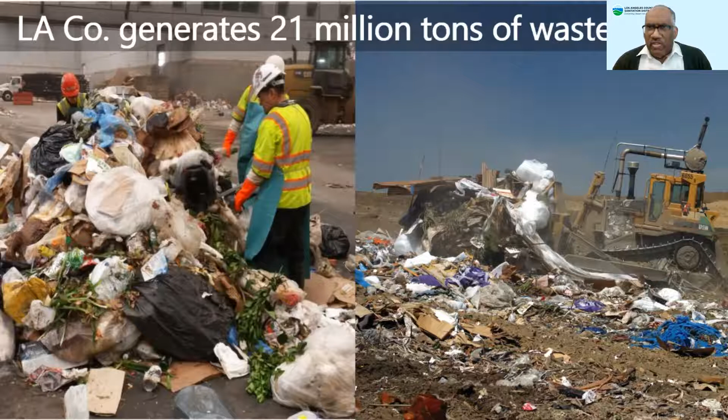Stepping back, LA County generates 21 million tons of waste per year. Of that 21 million, about 9 million is buried in landfills. Here's an aerial shot of one of our landfills, the Scholl Canyon landfill.

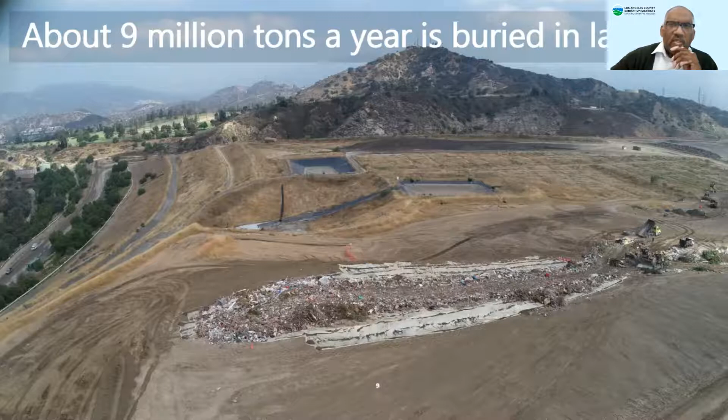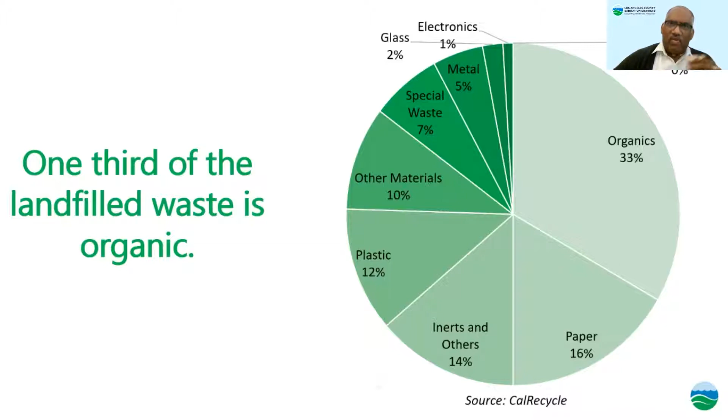Of the 9 million tons buried in landfills, about a third of that is organic waste. And of that organic waste, in LA County alone, minimally 4,000 tons of food waste is thrown out each day. Here's a shot at our Puente Hills material recovery facility of food waste coming in, organic material coming in.

So what's the issue? This food waste, when disposed of in a landfill, can release methane into the environment. Methane is a greenhouse gas that, for a long time, I thought was 23 times more disruptive than carbon dioxide, but looking at the state's website, it's over 50 times more disruptive than carbon dioxide as a greenhouse gas. Food waste itself generates about 6 to 8% of the methane in our atmosphere.

So California, being a leader in environmental regulation, is out front in terms of climate change initiatives. They passed two laws: AB 1826, which requires commercial organics recycling. A couple of years ago, it applied to any company that produced 4 cubic yards per week of organic material, but because we weren't meeting the state's goal, they lowered that number to 2 cubic yards per week.

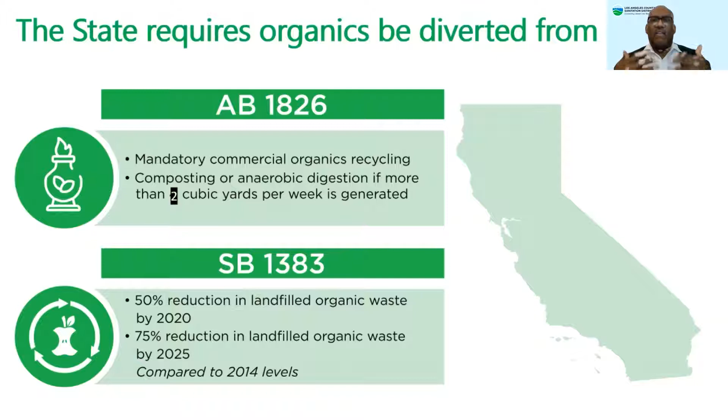So if you're producing 2 cubic yards per week of organic waste, you have to have a mandatory organics recycling program. The second law, SB 1383, requires a 50% reduction in landfill organic waste by 2020 and a 75% reduction of landfill organic waste by 2025.

Genesis, up here, there seems to be a question. I'll take a question right now. Yeah, what did you mean by commodity?

Commodities, plastic, cardboard, glass, anything that we want to divert or recycle as much as possible. At our Puente Hills MRF, we have the capability of pulling out cardboard, plastic, and paper, baling it up, and selling it to folks that will recycle and reuse it.

All right, perfect. Thank you.

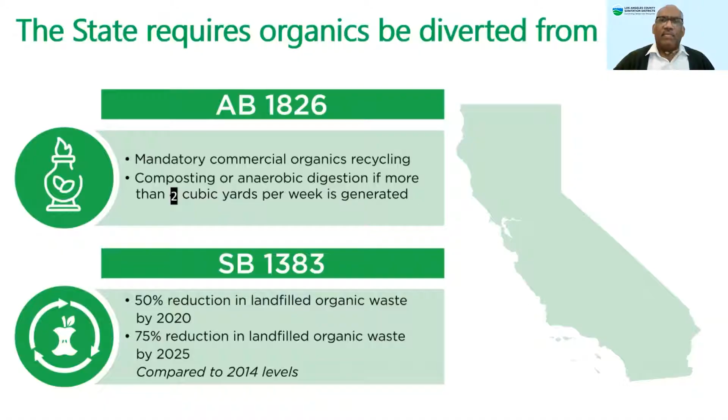SB 1383 was passed a couple years ago, and it requires cities and jurisdictions in California to divert food waste and organic waste from landfill. Each jurisdiction should have a program in place by January of next year, so we're less than 11 months away from that deadline. The districts are uniquely situated to help our cities, since 78 of the 88 cities sit on our board of directors, to help them meet this organics diversion requirement.

We have a solid waste site, our Puente Hills Material Recovery Facility. It's the foundation of our solid waste management, a place where we can collect food waste that's brought in.

SB 1383 in California is for food waste. We want to keep it out of landfill, and if it can't be reused, in terms of being donated to food shelters, then the state wants it to go either to anaerobic digesters or composting. We have a lot of anaerobic digesters, about 24 at our largest wastewater treatment plant in Carson. Bringing those two sides of our agency together allows us to provide this service at a pretty low cost.

So let's look at our food waste recycling program. It has several steps. The first step is unprocessed food waste comes into our Puente Hills MRF, from your grocery store or restaurant. We want that food waste to be as pure as possible, ideally 90% or higher food waste in that waste stream.

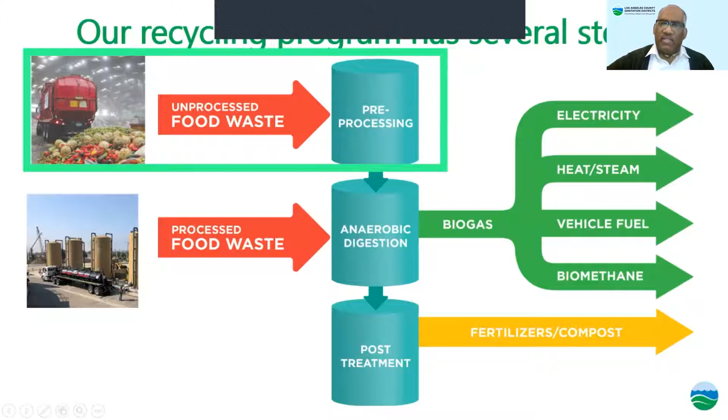Let me step you through each step. First, source separated food waste is collected, like tomatoes or vegetables from a local grocery store in a bin. Then your hauler will bring it to our Puente Hills MRF, driving up to the scale, where they pay about $70 per ton for the food waste.

But if you enter into a contract with us, we could even lower that amount to $5-10. And you see a good shot of some of the source separated food waste that comes to our Puente Hills Material Recovery Facility.

Let's take a look inside the Material Recovery Facility. This facility was built in 2005. It's right at the 605 and 60 freeway, so you have quick freeway access. It's completely enclosed, a green building, and you can see the skylight in there to reduce our energy costs.

As you drive in, you can see some of the commodities that we pull out, bale up, and sell. In addition to recycling other types of things, the food waste would come in, and we have an area designated for our food waste recycling program.

Here's the system that we use to convert the source separated food waste into a slurry. Right now the Puente Hills Material Recovery Facility is processing about 30 tons per day of source separated food waste. The facility's infrastructure can handle up to 165 tons per day of source separated food waste.

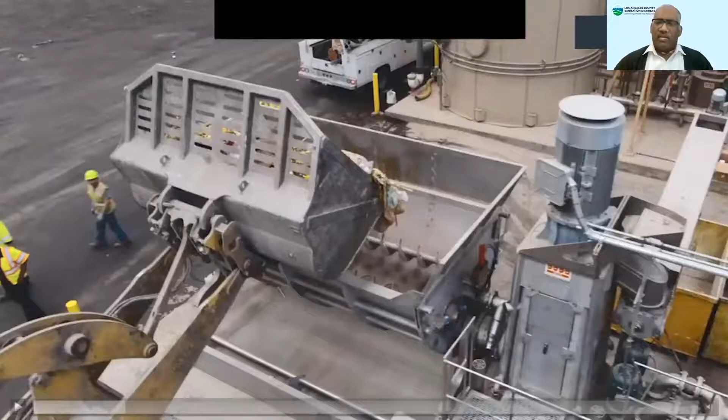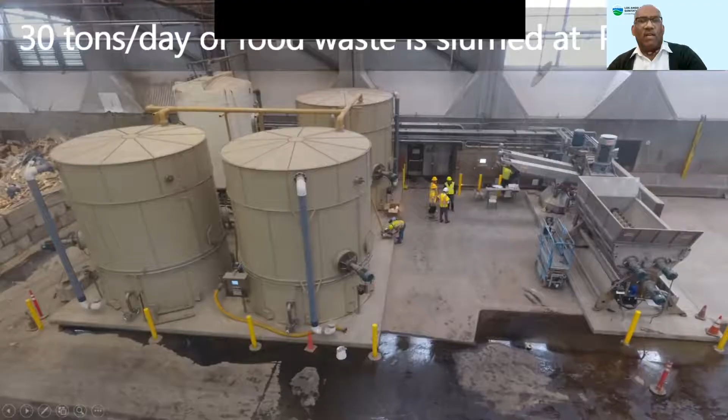And then unfortunately, because we optimize for video, sometimes you'll see a gray little box at the top, but that'll happen because we're optimizing for video. I want to back up. So he saw, let's go. Yeah, we saw that, you saw all of that. All right, so, all right.

And here's the Doda system. We have a hopper right here, where the food waste gets put in. We have two bioseparators, which are like motorized garlic presses that squeeze the food waste through openings that get progressively smaller from this bioseparator to the next. It creates the slurry that we store in these 3 tanks. And if we need water to create the proper consistency, we have a water tank here. So let's go to the videotape.

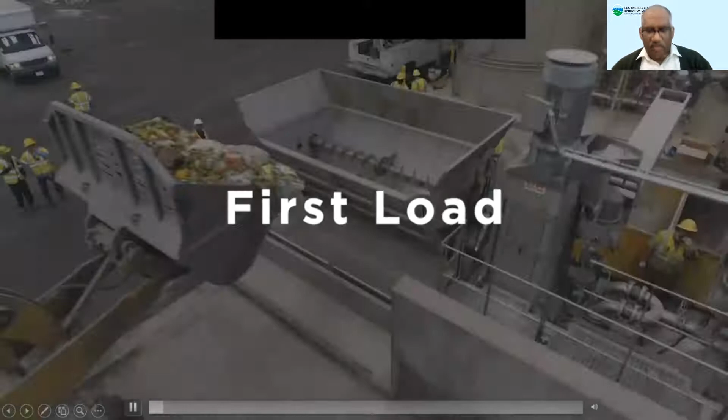And I'll take questions as the videotape runs. Can you tell, is slurry like slush? We'll get a good shot. I mean, it's like one of those breakfast fruit smoothies, and Will could probably tell you what the consistency is, but we're looking for a certain consistency.

Most of the time, the food waste that comes in has enough moisture content that as it goes into this bioseparator, it's squeezed through little openings, almost like a garlic press, where the garlic comes out the openings and the cover stays inside. So here you see the inorganic material, the plastics and so on that we don't want.

So the video is still frozen for me, Basil. Maybe it is for the rest of the audience.

But yeah, the texture we're looking for is anywhere from about 13 to 15% solids. The rest is liquid, primarily so that we're able to pump and move the material out from tank to tank. Like Basil was mentioning, once we get this video up and running, the Doda machine is a 2-stage bioseparator. The first stage squeezes the organic fraction out through basically a sieve or garlic press, 13 millimeters in size. So the larger inerts are removed in that first phase.

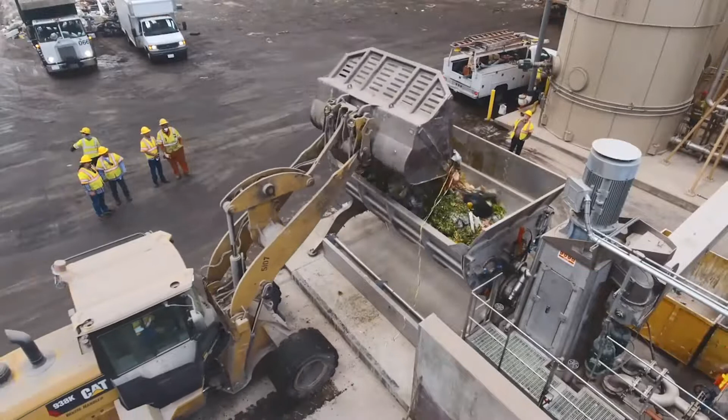So you can kind of see the rejects in this video. The first load's going into the hopper. The augers move the material back and forth, and that helps break up some of the organic fraction from the bag. You can see that the material that comes to our MRF still has quite a bit of bags and contaminants or cardboard that needs to be removed. This hopper moves the material back and forth and helps break up some of those bags to release the organic fraction.

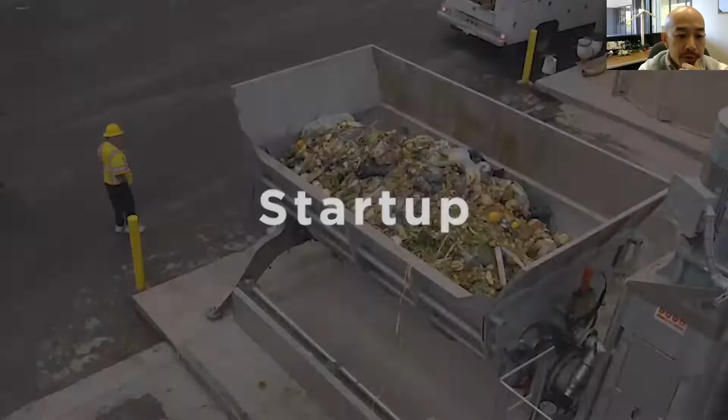Will, can you see the video moving? Yeah, it's moving now, I took off optimize. I think the optimize feature doesn't help.

So this is our inaugural load at the Doda machine, you can kind of see the rejects being discarded on the top of your screen. There's a motor on top, it's going a little fast, but you can see the rejects on the top left of your screen. Primarily plastic film is removed, pushed out of a screen size that's 13 millimeters. That's what we call the primary separator, so those are the larger portions.

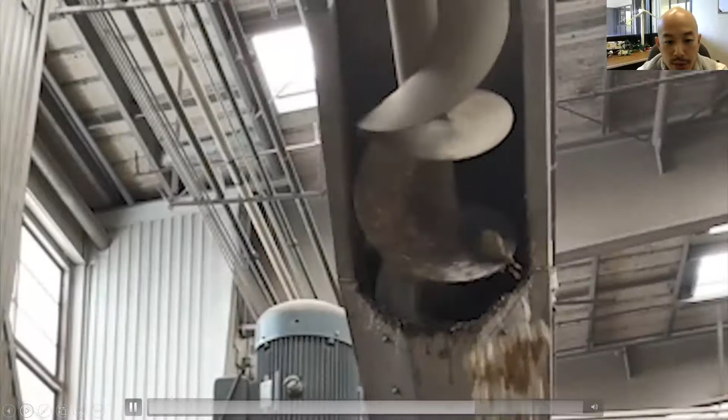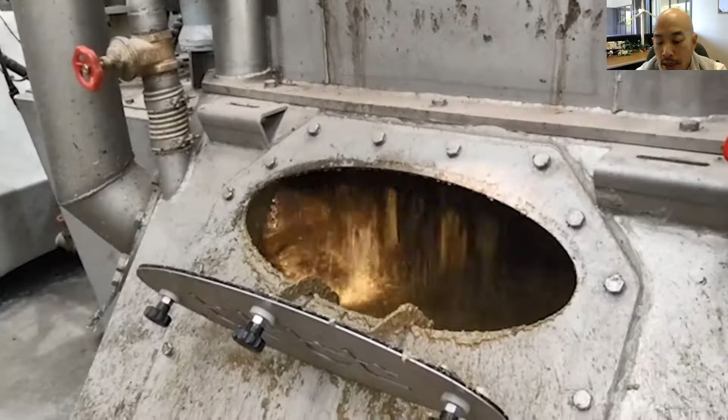The secondary bioseparator is a refinement of the first stage. The screen size is stepped down to about 8 millimeters. So the material that's pushed out is a lot finer, a lot wetter. A lot of times we take the rejects from the second bin and rerun it into the system, and that gets processed even more, so more material gets processed into the slurry that you see there.

Yeah, and it gives you a feel for what the slurry looks like. So it gets dropped down into the hopper, we dilute it with reclaimed water, and then that material gets pumped into the storage tanks directly adjacent to this machine.

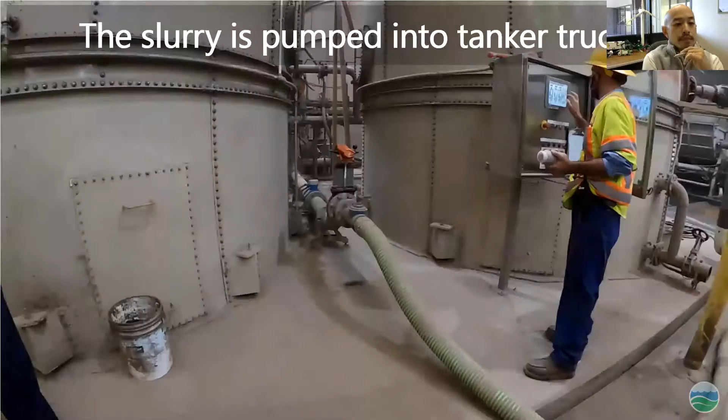And then once the slurry is created - don't go away, Will, you're the expert on this. The slurry is then pumped into a tanker truck, and you can see one of our drivers loading up his tanker truck. Will, do you want to say anything about what the driver has in his hand, that sample?

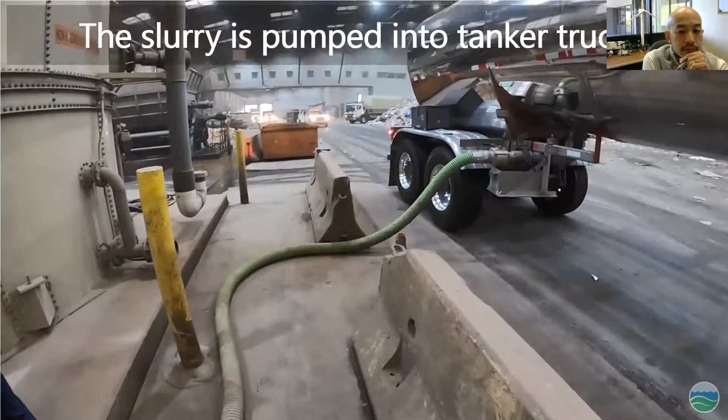Sure. So before any load arrives at our next phase, we want to make sure that all the material being loaded into the tankers, the slurry so to speak, meets pH and electrical conductivity specifications. That's in an effort to prevent any contamination or large upsets to the wastewater treatment plant, because the last thing you want is a truckload of highly acidic material upsetting the biological process at our wastewater treatment plant. So every load, every time, they take a sample so we can go back and look at it.

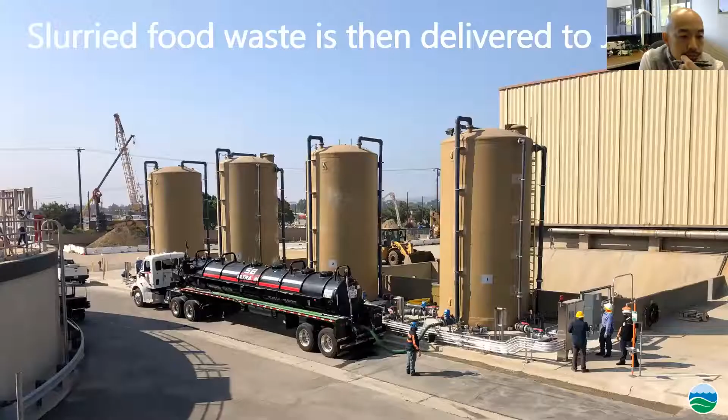That truck then makes its way to our joint water pollution control plant in Carson, our largest treatment plant. Will and the rest of the folks in our solid waste and wastewater group recently completed a receiving station. You see 3 or 4 receiving stations, 2 are online, where the food waste slurry is offloaded into these tanks. And then from there, the food waste is fed into one of our digesters. We'll go to the next shot.

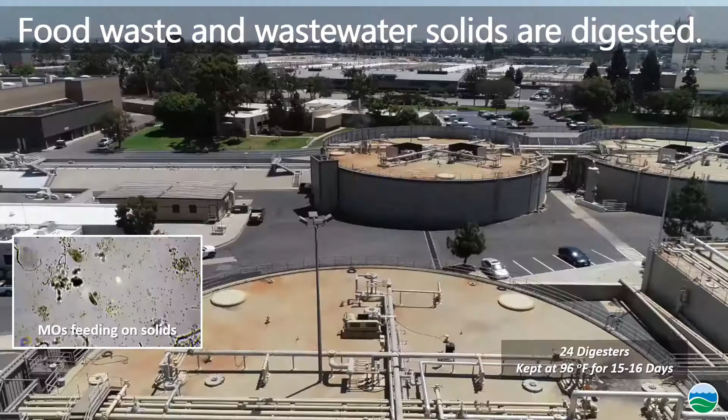So this is the next step in the process, where the food waste goes into the digesters and we create biogas. Here's an aerial shot of some of our digesters at the joint plant in Carson. These are set up just like our stomach - it's an anaerobic, oxygen-free environment. Microorganisms that thrive in that environment take that organic material and generate biogas, which is mainly methane and CO2. Same as the methane you might see in a landfill, but the beauty of this is it's completely sealed, completely closed.

What we do here is mix the food waste slurry and the wastewater solids. So it's still primarily a wastewater treatment plant - the solids that would go into the digester are mixed with the food waste, and it bumps up the biogas production. We have about 24 digesters, set up at about 96 degrees Fahrenheit, and the materials in the digester sit there about 15 or 16 days.

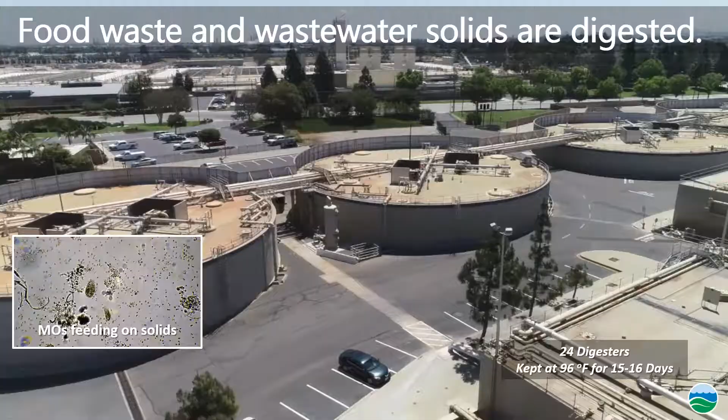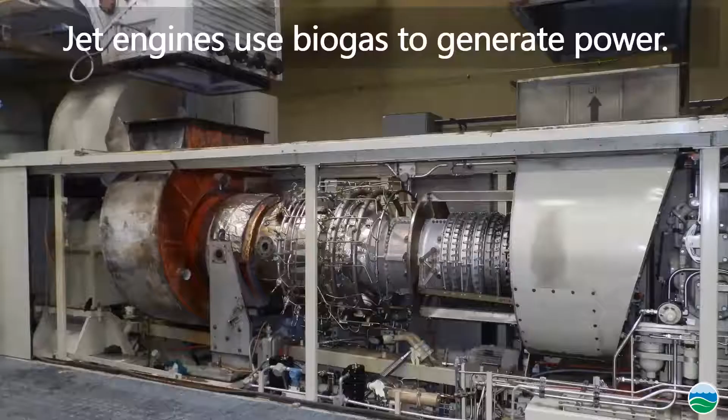And so that biogas that's been created, we then take it to jet-type engines, and we generate power at our power plant at our joint water pollution control plant. Our joint plant is basically energy self-sufficient. That gas goes into the power plant, the turbine generates electricity, and the steam that comes off generates even more power. It goes into what we call our total energy facility, which is a 20 megawatt power plant, and that's enough power to run the joint plant in Carson. So it's basically energy self-sufficient.

The reason it's not completely energy self-sufficient is that from time to time we have to take it down for maintenance. So as we get more and more food waste, we're generating surplus biogas, and what our solid waste energy crew has done is clean up this surplus biogas and use it as vehicle fuel.

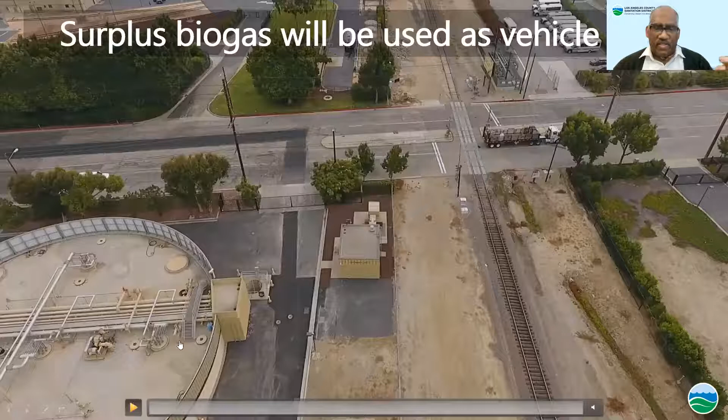This latest component of our food waste recycling program came online in November of last year. We've been doing food waste recycling for at least 6 years, but this is the latest addition to how we're doing it. So I want to show you aerial footage - you see the edge of a digester. They recently built an underground pipeline to take the biogas over to a compressed natural gas fueling station at the corner of Sepulveda and Figueroa that we've partnered with Clean Energy on over the years.

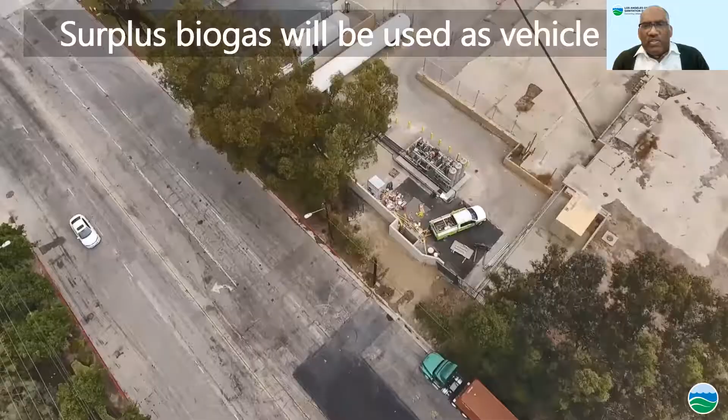That gas station, the compressed CNG station, is typically fueled with landfill or natural gas from the pipeline, where we're going to try to wean that fueling station off that and use the biogas from food waste instead. So the biogas line comes right here - here's a biogas conditioning system. What it's going to do is take the gas from about 60% methane to over 90% methane to make it renewable fuel. Once it's been refined, it gets stored in these tankers, and then we dispense it at this fueling station.

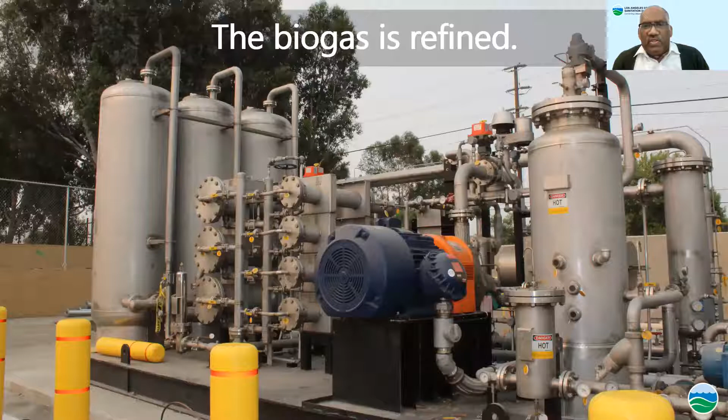Here's the biogas conditioning system that was recently brought online. Basically what it does is take the biogas from 60-62% methane to over 90% methane.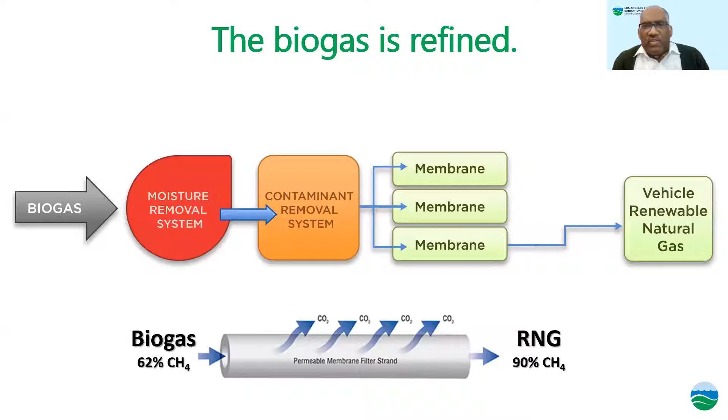Hey Basil. Yes, go ahead. There's a couple of questions that I don't know if you want to take the time to answer. Oh, go ahead, Will. I can read some of the questions from the Q&A that's posting up in the chat function, so I'll just go through some of these.

Kimberly asked, how does the facility smell? If you're referring to the MRF, the stuff that comes into our MRF is just like any other regular trash. Our entire MRF is completely sealed from the front end to the back end. There's an odor control system to make sure no odors leave the facility. Once it gets turned into a slurry, pretty much everything is odor-free, or all the odors are controlled. Once it gets into a tank, it gets transferred into tanker trucks, and once it reaches our slurry receiving facilities, all those tanks are hooked up to an active odor control system as well. So essentially, once it's turned into a slurry, there should be zero odors emanating from that material. That's one of the reasons CalRecycle really wants us to anaerobically digest this material, because once it gets slurried and put into the anaerobic digesters, all the odors and the gas produced from decomposition are trapped and utilized to produce energy or renewable natural gas.

Another question: how do you make sure no bits of plastic end up in the finished product? We have specifications requiring customers who want to bring us their processed slurry to meet our specification. For plastic film, for example, the specification is less than 0.5%. So in order for any customer to bring their material to us, they have to meet our specifications, and we can get into that a little later on.

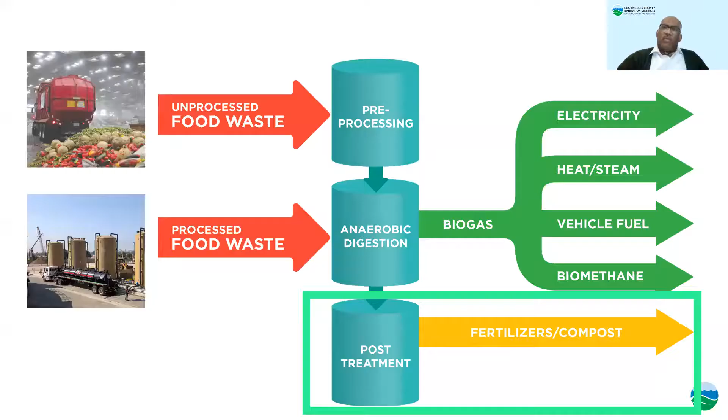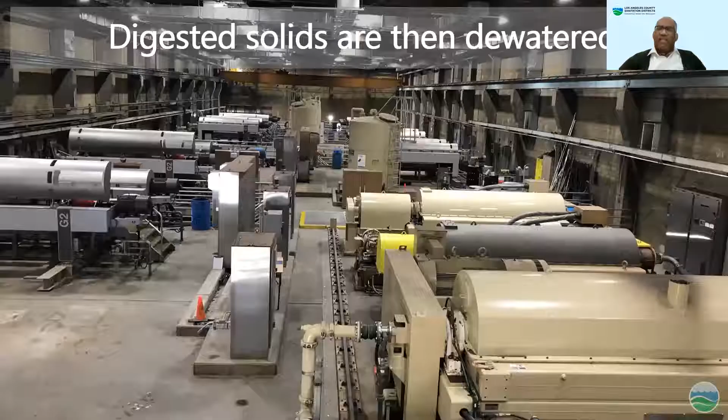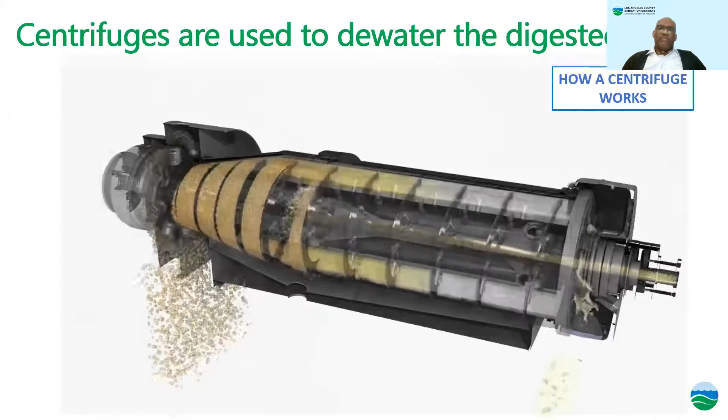This gas goes to our existing fueling station that you see here. Since November, we've been sending some of our biogas there. And the last step is what comes out of the digester, the material left over after the microorganisms have had their buffet. That digested solid is dewatered before we take it offline. We put it through what we call a centrifuge that takes it from 3% solids to about 30% solids.

So we dewater it so we don't have excess liquid, and this is what it looks like after it's dewatered. We call it biosolids cake because it looks like crumbled chocolate cake to us. And this is what's being produced at the joint plant in Carson.

Even this, we're looking to recycle it, and we are recycling it. That stuff gets trucked off site. We have about 50 trucks a day that come to our joint plant, and most of it goes to about 5 or 6 sites that we take our biosolids to. We mix it with agricultural waste and create a soil amendment that we either sell or use to augment farming in various areas.

So we're currently at the joint plant. There are 2 entry points into this food waste recycling system. You could have source separated food waste at the Puente Hills Material Recovery Facility, where we can take up to 165 tons per day of food waste, or we can take slurry right into the joint plant. Right now we have about 8 haulers bringing food waste slurry to the joint plant, for a total of about 300 tons per day. The maximum capacity we have at the joint plant to take food waste slurry is about 600 tons, so we're at about 50% capacity.

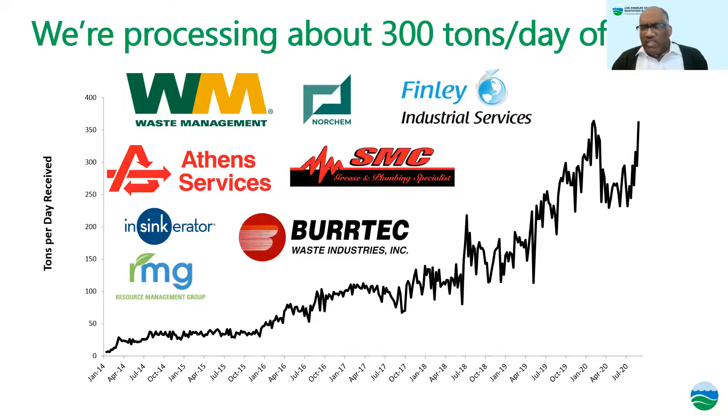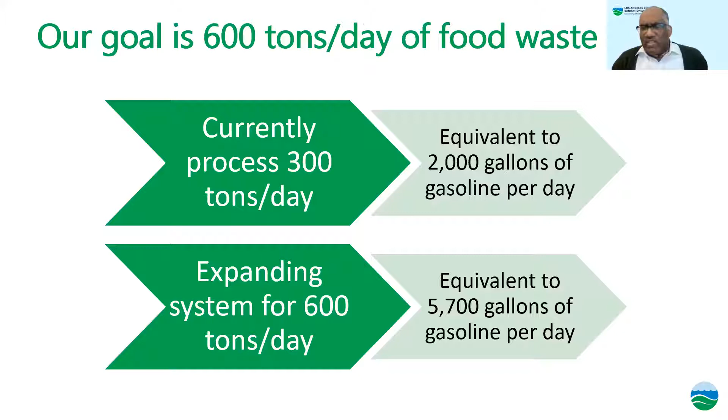That food waste slurry now is producing the equivalent of about 2,000 gallons of gasoline in terms of energy. When we max out the system at 600 tons, we should be looking at the equivalent of about 5,700 gallons per day of gasoline.

Hey, Basil, okay Genesis, go for it. One thing, can you try turning off your video and turning it on again? I'm sorry, I think you're frozen. Okay, you're good now. Sorry, you keep freezing your screen. Oh wow, that's interesting. Sorry, go on. Did you see it? Did you see any of the stuff before? Yeah, the slides, it was just your image, your video. Okay, right, my video is not that important.

All right, so we're going to continue to produce electricity that powers our treatment plant. Will and the folks in solid waste and wastewater, we're going to continue to produce vehicle fuel. And as we get more and more biogas, maybe down the road we'll look to inject it into the natural gas pipelines. So that's all we got in terms of our food waste tour.

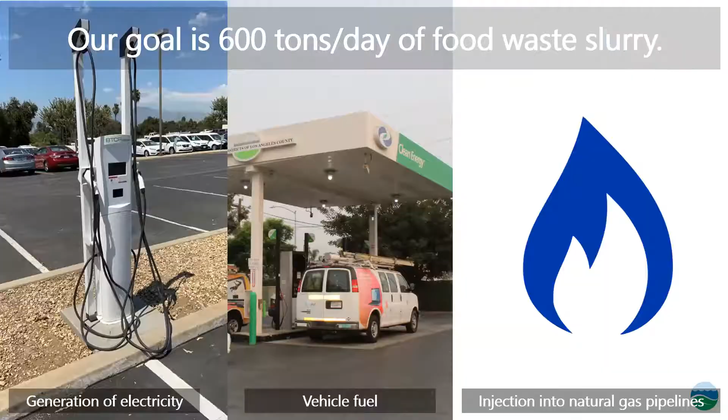Let's go to the questions. All right, cool, thank you. Let me stop your sharing. I wanted to keep it up just in case. All right, we'll bring it back. Okay, I will put it in the chat. Okay, I'll put it in the chat. And so, if you're interested, go ahead. Okay.

Let's see, Marilyn, would you like to ask your question? Marilyn? Okay, can you hear me?

We can hear you. How many plants do you have besides Carson and La Puente? And then the other question is, are you recording this video so that others can see it who can't see it now?

I will answer the second question. Yes, I am recording it and we will be uploading it on YouTube. So if there's anything that you want to refer to or go back to, I put the YouTube link in the chat. I'll put it in again, it might have gotten lost with the chats. So I'll put our YouTube link so that you can see the video. It'll be up by tomorrow.

And I'll answer the first question. So the material recovery facility at 605 and 60, at our Puente Hills landfill, can handle source separated food waste, taking up to 165 tons per day. That's where the source separated food waste goes. And then the slurry, we handle at our facility in Carson, the joint plant, which can take up to 600 tons per day of food waste slurry. So there are 2 entry points: you can bring the tomatoes before they've been turned into a slurry, or you can bring the slurry tomato to the joint plant where we can take it directly into our treatment plant.